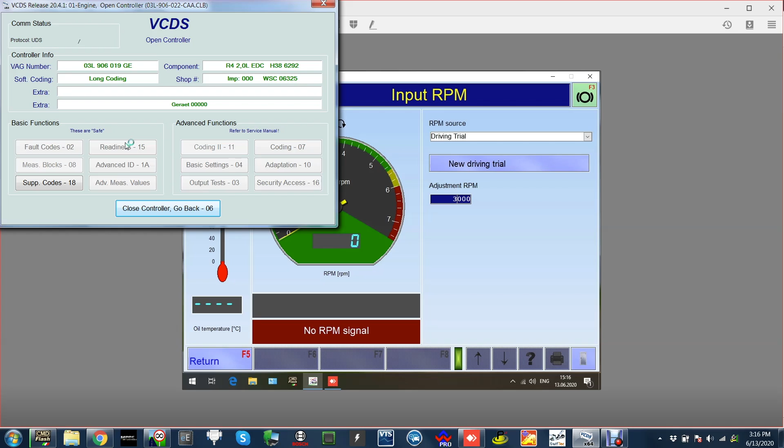So I'm going to go back out of that, go into engine, fault codes, don't worry about that. And then you've got advanced settings. So I want to load selection from file. I'm sure I've done this before and saved it, probably have done. 2 litre logs. So I'm going to switch over to the 2 litre logs. Have I got enough there? No, I haven't saved a lot on that one.

Engine speed, coolant temp, charge pressure specified, so I want charge actual. Charge actual, air mass actual, intake air temp, limitation smoke, and I need another one, accelerator pedal. And then I'm also going to have exhaust gas temp sensor 1. Just keep an eye on the EGT temperatures.

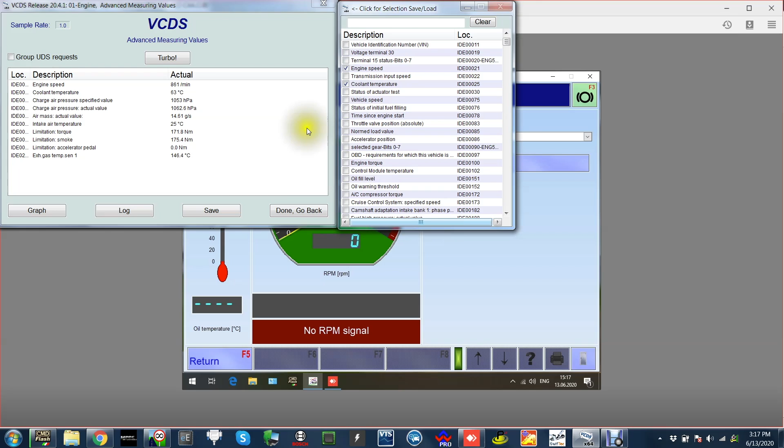So that is that. Now I'm going to save that because obviously I didn't save it before. So I'm going to go down to 2 litre D, logs, and overwrite. Yep. So that's always there when you want to pick it up again. You don't have to keep finding them and choosing them. So I'm going to go to log. I'm going to go to T6 stock run 1. So I'm going to get it in gear on the dyno. Set the dyno up to the van.

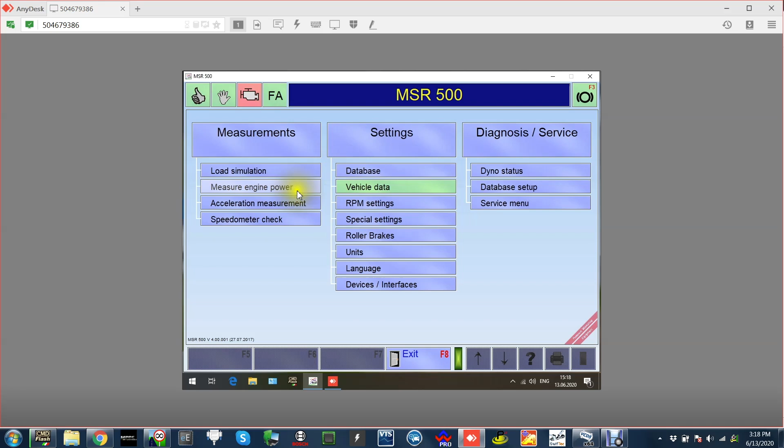So switch to 2-wheel drive mode, just for the purposes of this. If I go to vehicle data, front wheel drive, accept, unlock, back to measure power, continuous measurement. Normally run these 4-wheel drive, for some reason it doesn't like it today, so I'm just going to run it 2-wheel drive with the SPL. So get it back in.

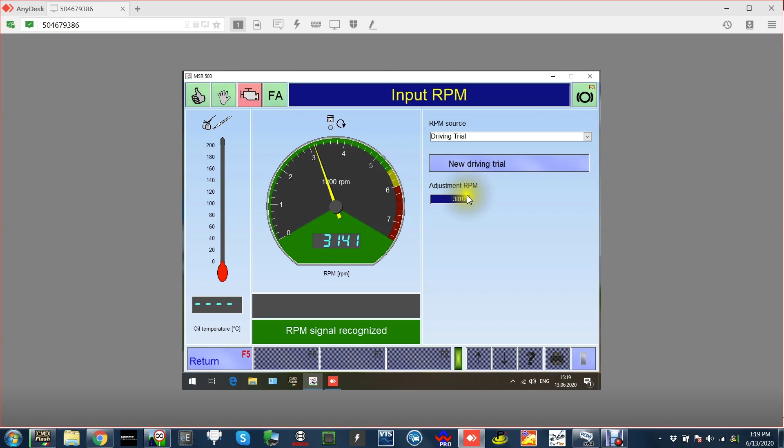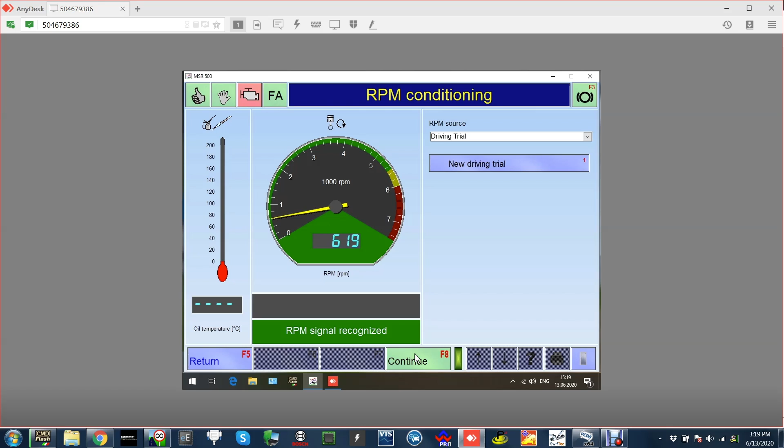Better. Bit funny down low still. Right, set 3000, 3000. That's set. Come to a stop. That'll switch over, open up your logs, start. So I want to go in gear 4, this is a 5-gear van, not the best vans but it'll be alright.

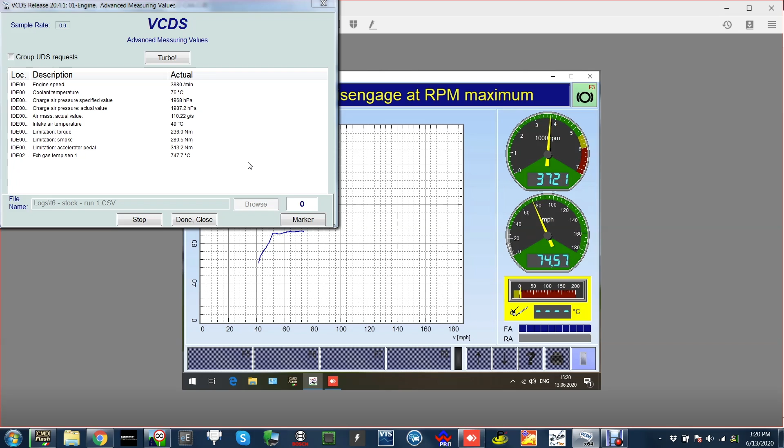Load it up, 3, into 4, right now run. Let it run. It's quite a warm day. As you can see, the intake temp's getting quite hot, and so is the EGT. 4.5. Should be about enough. So let it run down, measure the losses. Stop the logs. Done, close.

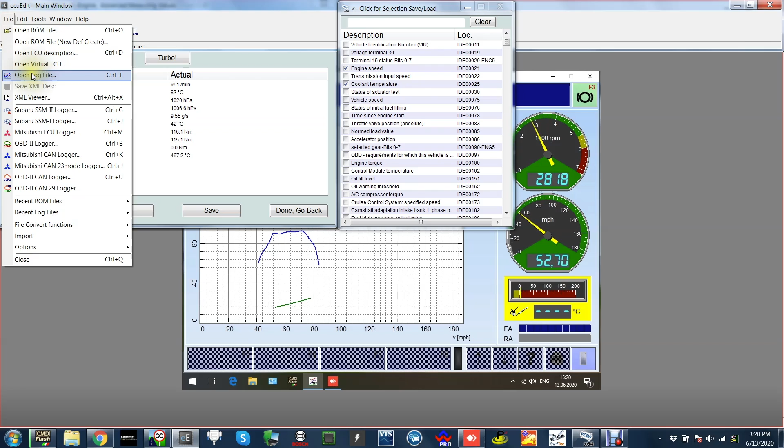And there we'll save. So if I look now into the logs, open log file, T6 stock run. Right, so there you go, we have the run. It's quite a long run, got the ramp quite low. So as you can see, EGT was at 747, not too bad. Limitation accelerator pedal was 420 newton meters dropping. Yes, 420 down, it drops down.

And then we've got the limitation of smoke, it's a little bit less at 391, 385, and then we've got the limitation of torque. So straight away you can see that's going to be my limitation, because when the ECU is doing the torque, it looks between all three charts. So right, I'm requesting this much, the smoke is saying this much, and the torque is saying this much. So the lowest of those three will be the one that it actually does, and in this case it's going to be the limitation of torque.

So our air mass is quite good still. Charge air pressure 1.4 bar peak. You can kind of forget the peak, look more towards the hold, slight overboost. So it's 1.3 bar, 1.245, 1.1. So you take away the atmospheric pressure, so it says 2.1 but it's 1.1 depending on the atmospheric pressure today. Charge specified is, if I can get on it, 1.2 bar, so fairly low.

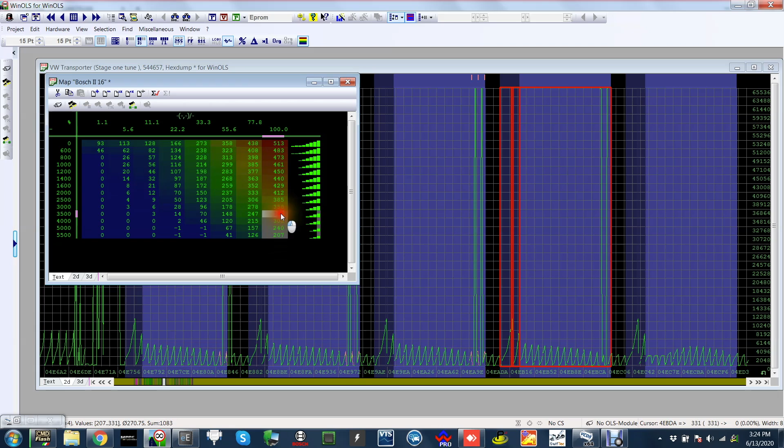It's always awkward working on a laptop when you're used to using a mouse on the screen. Difference between Dyno and sat on the computer.

So it's like a 4x4 map. Just gonna bump it up anyway. Let's get them all above 300 newton meters. Right, so that's that done. So next, that's the driver's wish now above 300 newton meters. So we should be away from that limit now. In fact, we'll look into it actually. I think I'm going to need more. We'll come back to those.

So next things we know. So we've got the torque maps. So now we know that these are limiting us to 300 newton meters. As you can see, it's what, 292, and backs off. So they're very low. Now what I do is I look at the torque conversion maps. There's two maps, major boost maps here. So you've got these two maps here. Now these are calculated to tell the ECU what kind of fuel it can use. And this top line here is newton meters.

I'm only here. So 300 newton meters on the logs. If we look back at the logs, the lowest was 300 newton meters, which was the torque map. So that's the map that this van is going to use. So you've got 297 peak. So I'm only on this line here. I know that I can move to here and still be covered by how the ECU is already set.

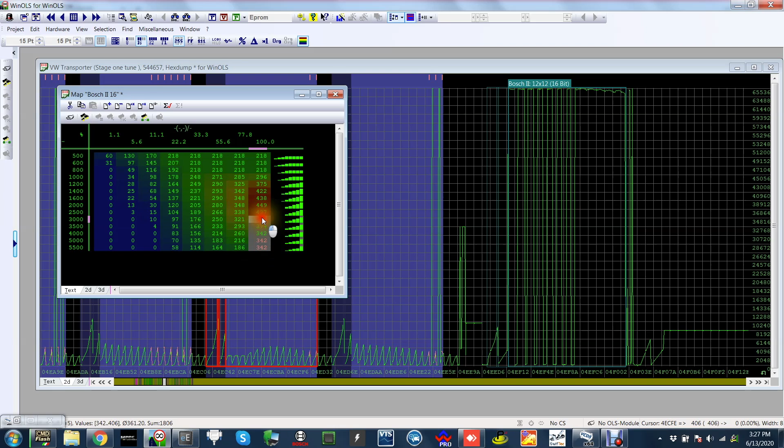So if I use this, I'll show you. So if I go to the limit maps, I've got these driver's wish maps here. Right, I've got 420 Newton meters, so I'll bump all these to 429, 429, 429, 429. So I'm above 420 Newton meters in these there. So just to make the power, let's get these up above. I'll press something else there. No, that'll be okay. Still above.

So to get the power up, right, I've done them. So they're now out of the way. Let's deal with the Newton meters first, and then we'll go back to everything else after, and I'll show you what's going to happen when I run this van with just changing these few maps. So these are the torque maps. These were the lowest maps, if you remember, from the previous. So the peak on these vans is quite low, and it holds.

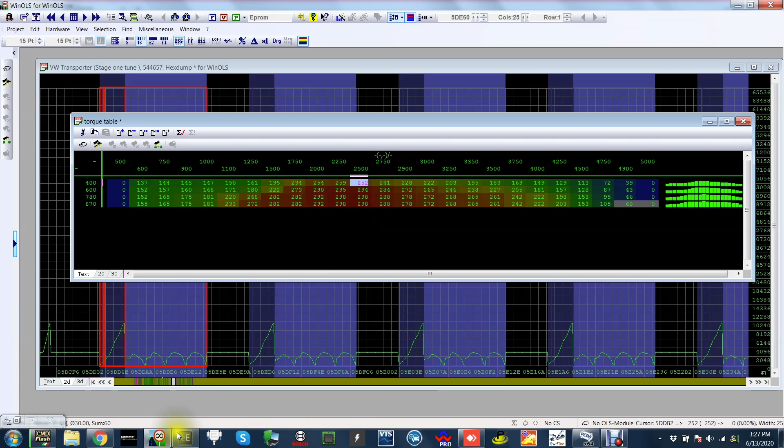If I get that dyno graph up, the peak's around two. Being a diesel, it should be around here. It started to run quite late, so around 2k, 2.2k is where it starts to really start ticking off. So if we go here, bump that up, and just blend it in for the rest, just to give it a smooth transition. Obviously I'm not going to see these two lines, I probably won't even see the third line, so I'm just going to move those off.

And that's what I'm going to do. I'm going to copy the bottom line, so 870 atmospheric, being in the UK, is about right. So I'm just going to load this in on all the maps for the purposes of this video.

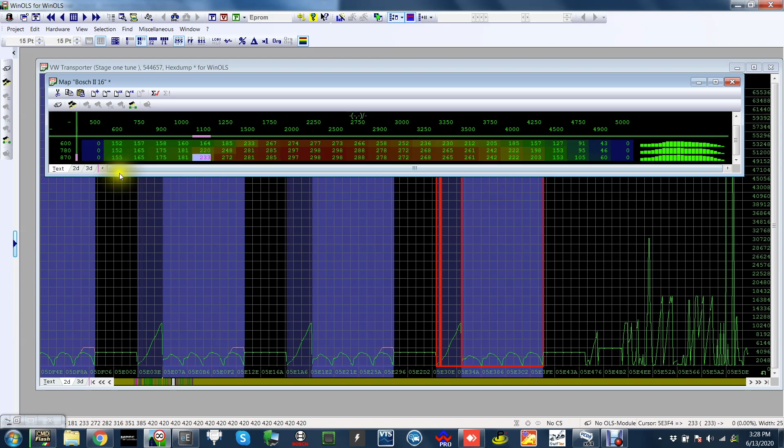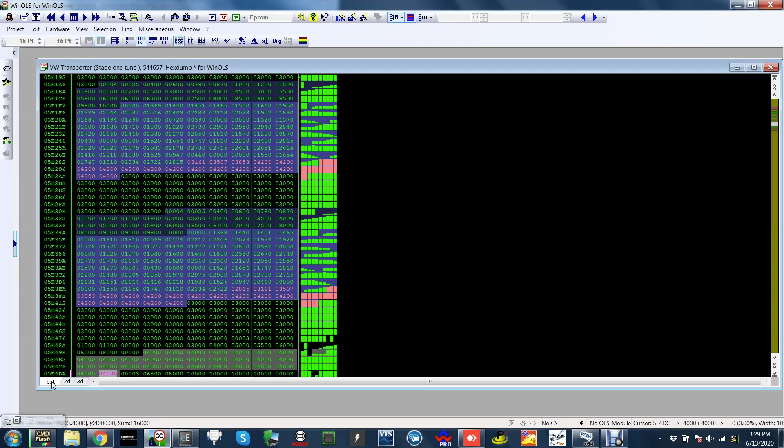So my lowest map is now at 420 Newton meters. There is a limit here somewhere, I think it's that one there, which is also at 4,000. So I'm just going to bump this limit up to 4,200, just to make sure I'm not capped by anything. So bump that up. Okay, so now my torque limits are at 420 Newton meters. So there's one left, which is a smoke map.

So we need to go back to our Newton meter conversion table, which is here somewhere, and let's see where we are with this. So if we go back to our Newton meter conversion table, we're at 420 Newton meters. Now we're going to be at 65 milligrams of fuel. So straight away we're going to move into a higher level of fuel. So if we look into our smoke map, it's at the end here, we're going to have 65 milligrams of fuel.

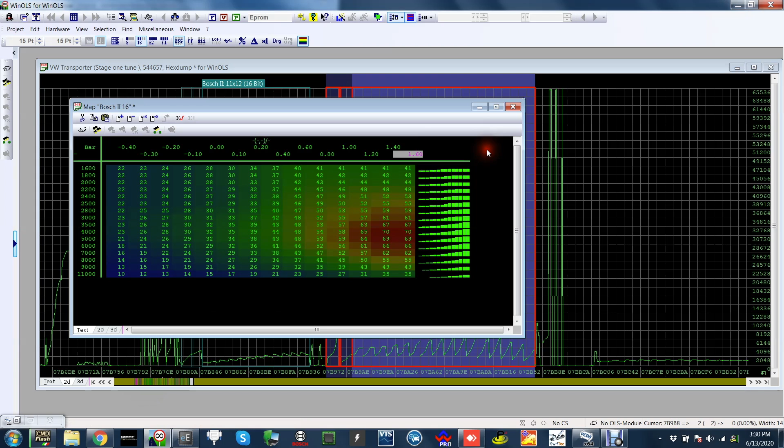Now I'm going to be around here now, so anywhere between there to there, 65 milligrams is there, so I've still got enough there to cope with it, so that's fine. I'm up to 1.6 bar as well, boost pressure I can have, so I don't really think we're going to touch that. So let's look at the boost tables.

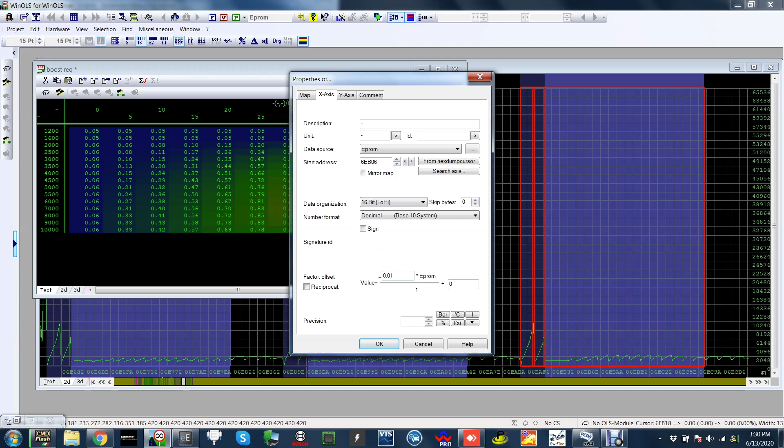So these three are the biggest. So this is boost. So if I call this boost request, and then I switch it to bar, to make it more sense. Top line is milligrams of fuel. So we've got RPM at the side, obviously done wrong on there. So if I go 0.25, no, 0.5, yeah. So I've got 0.5, so I've got RPM, I've got boost in the middle, minus atmospheric pressure, and I've got milligrams of fuel at the top.

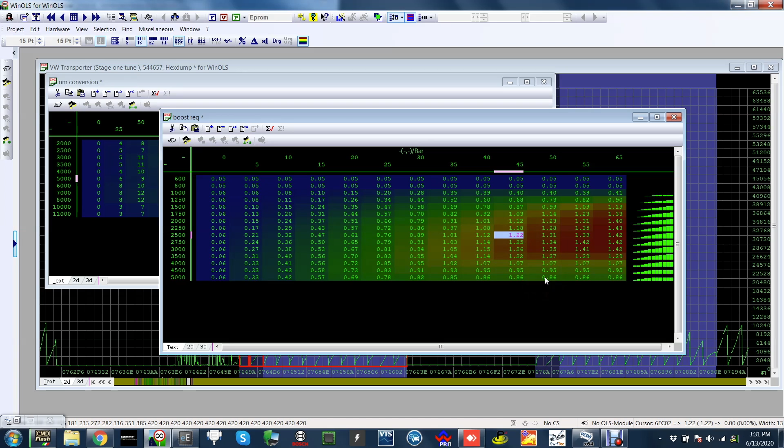Now, when I was on the old table, if I go back to that Newton meter request table, just gone past it, if I go back to here, before, at 300 Newton meters, I'd have been running around 45 milligrams of fuel. So I'd have been running around here, on this line, so at 1.2 bar. If you remember, I was at 1.22 bar request. Now I've bumped it up to 65 milligrams because I'm on 420 Newton meters, because I've moved all the limits. I'm at 65.

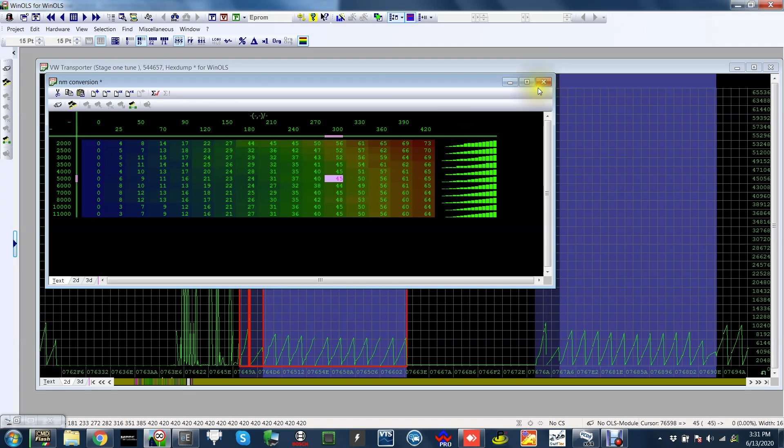So now I should see, without me making any changes, about 1.4 bar of boost. So I've raised the boost by 200 millibar without making any changes to this boost table. That's if what I'm saying is true, that's what will happen. So the torque limit's gone, the driver's wish is gone. So I'm just gonna now export this. Stage 1, 2, nope. Say YouTube. Export this in now.

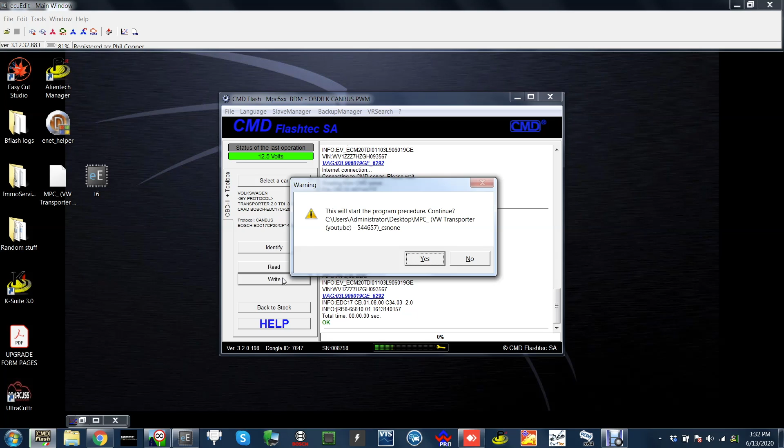I'm going to write this to the van. Just get me switch the van off. Find the cable, it's on the floor somewhere. Here it is. I'll plug this in here. Right, I'm going to write that map onto this van. So that one there. So identify, yep. Right. Smash that on here. And then we'll see what we make just off those few changes.

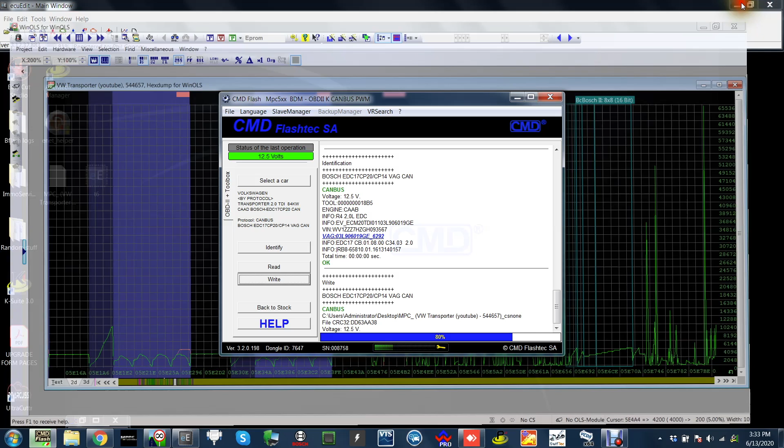So all we've done while that's writing, I'll go back to the start. I've got 1, 2, 3, 4, 5, 6, 7, 8, 9, 10, 11, 12. I've changed 12 maps. Just by looking at it, working it out, seeing what they've left me, see if there's any free power to be made without really changing how the OEM have set this van up. I've got 12 maps changed, and well, 2 groups. So let's just write this on now. I'll fast forward this bit just so you can get to the nitty-gritty stuff, which is going to be the next dyno session.

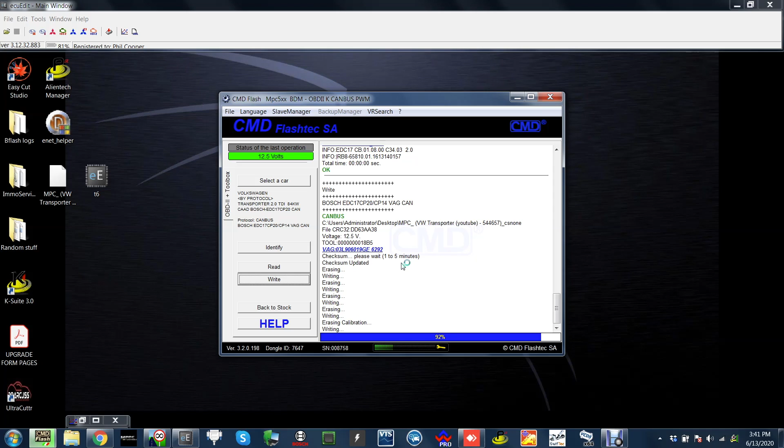Right then, so done. That felt like it took forever, but that was 9 minutes and 30 seconds. Right, so now van off. Hopefully it starts. Yeah, it started. Right, it seems to have flicked off the ESP again, so I'm going to have to set that back on. I'll just get all plugged in. Right, VCDS. All plugged in? I think I am. So let's get back on this.

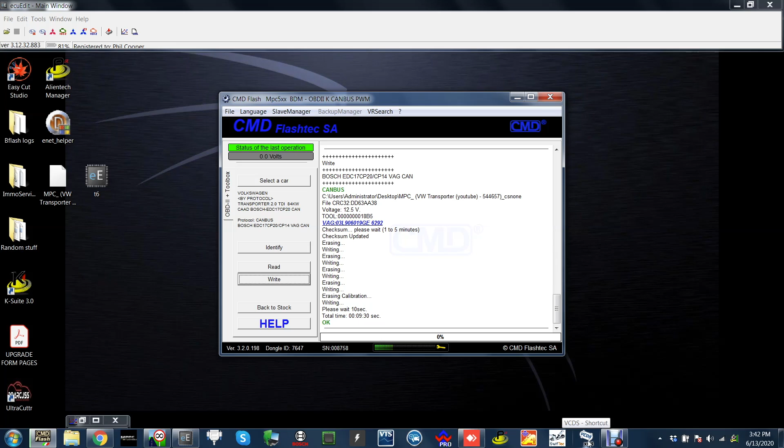So VCDS, select module, ABS brakes, basic settings, switch to roller test bench mode. Go! Right, that's now on.

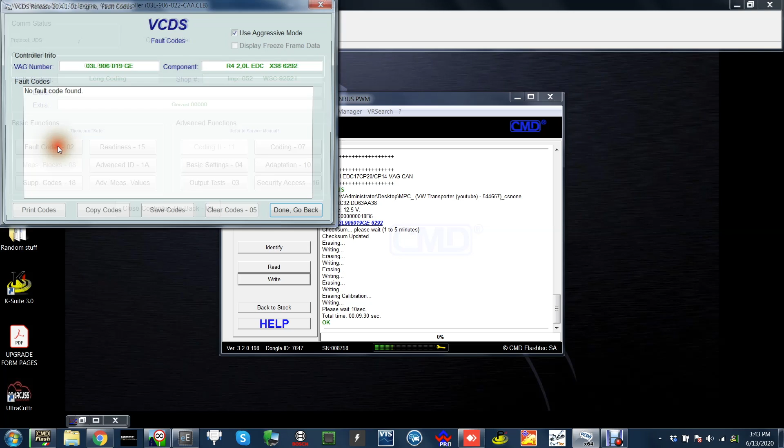Back out there, back into engine. Fault codes: none, still, that's what we like. So we go back to advanced measurement values, back onto that same file we were on before. 2 litre logs. There we go. So back to the dyno.

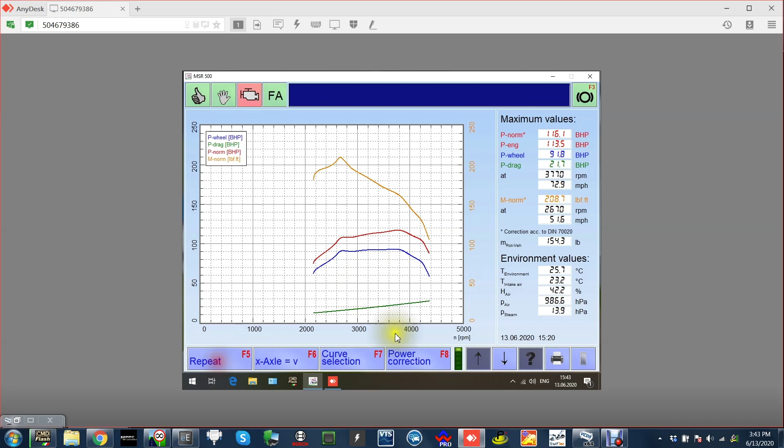So I'm going to save that so you can see the difference between the two. So save T6. Yeah. File: stock run. That was a stock run. So I'm going to repeat. I'm going to load the stock run back over it, like so. Right, let's run it up again then. Let's get back into gear. Set this log off.

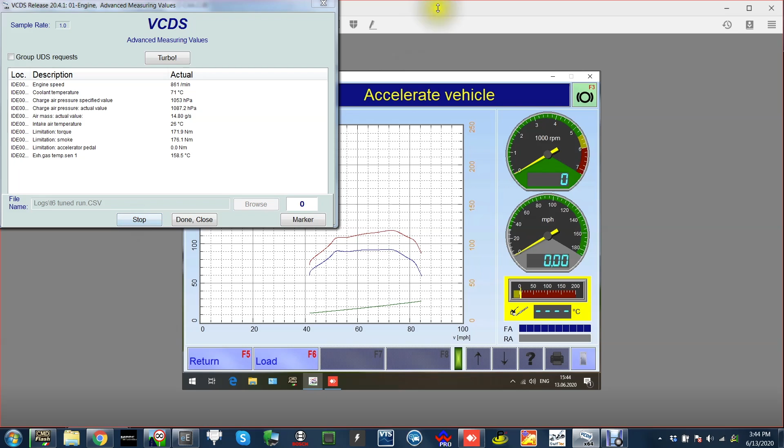So T6 tuned run. Tuned as in I've moved what, a couple of tables. Right then, so just moving these few tables, let's see what she makes. So I'm going to start the log off. Fans on, dyno's on. Let's go. Back into gear. Back into fourth. There we go. Nope. Yeah, it played up a little bit then. They do sometimes. Let that run down, run it again, get it in the right gear.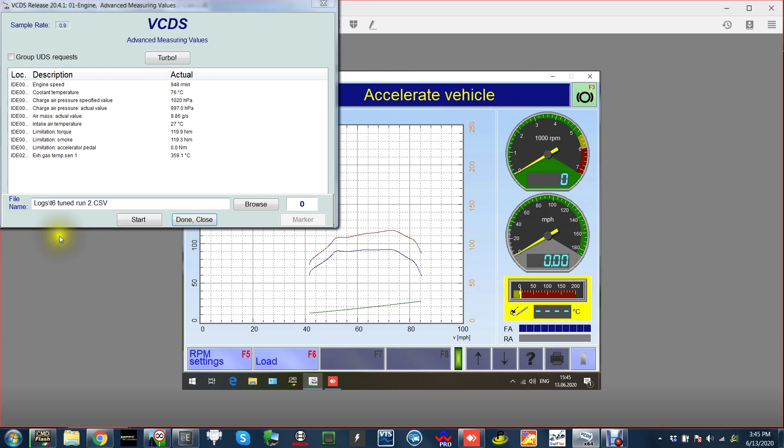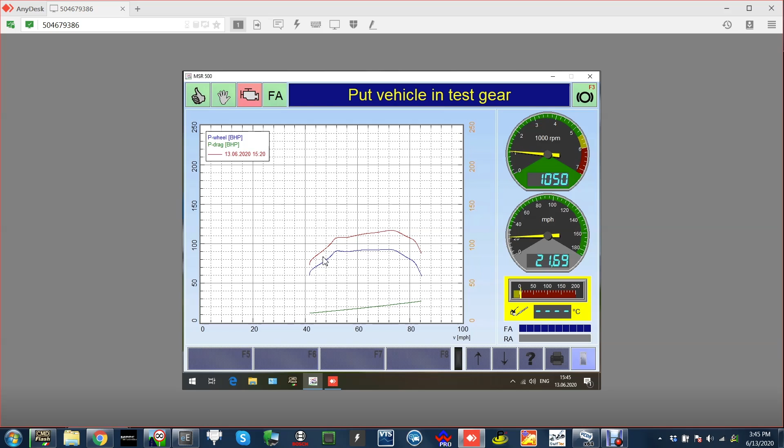Rapid, right, repeat. Yes. Right, we go again. Let's bring it to a standstill. Going to stop and start the logs. Stop. Done, close. Log: T6 tuned run 2. You get this on dyno sometimes, as long as you don't keep doing it. Right. Get the right gear. Let it load up. There you go, 4th gear pull.

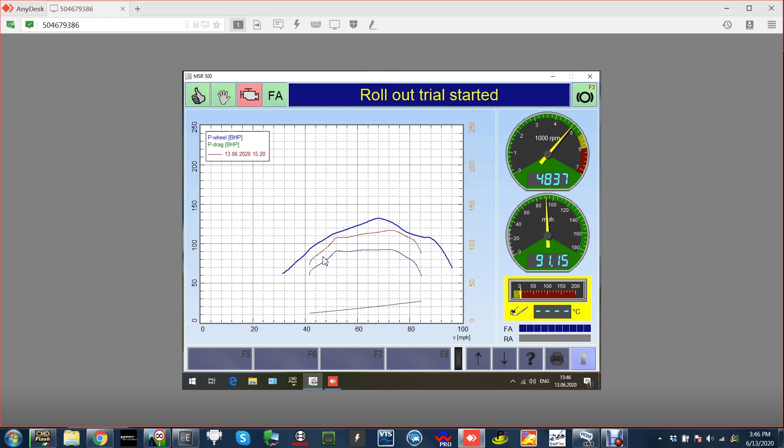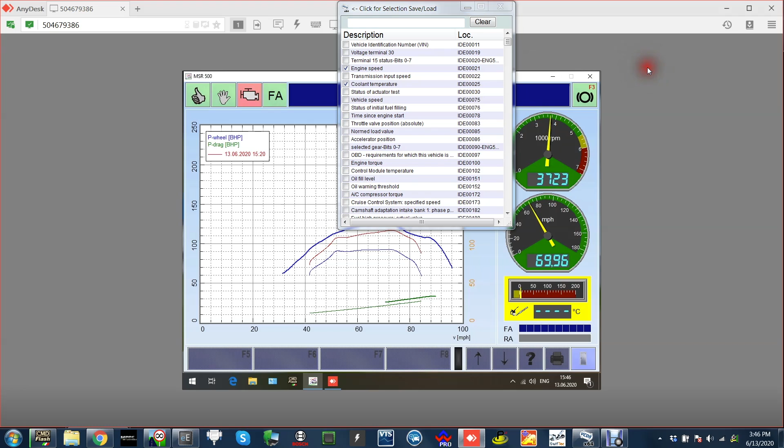Just going to stop the logs. You can have a look over those. Let that run down. Remember, this is just a few little maps that have changed, 2 tables in a sense, really. And we are now at 158 horse, 265 foot-pound. So as you can see, it's very much changed the way the graph is. It's quite a hot day today. So there you go. Just moving these two tables gives you enough to get going.

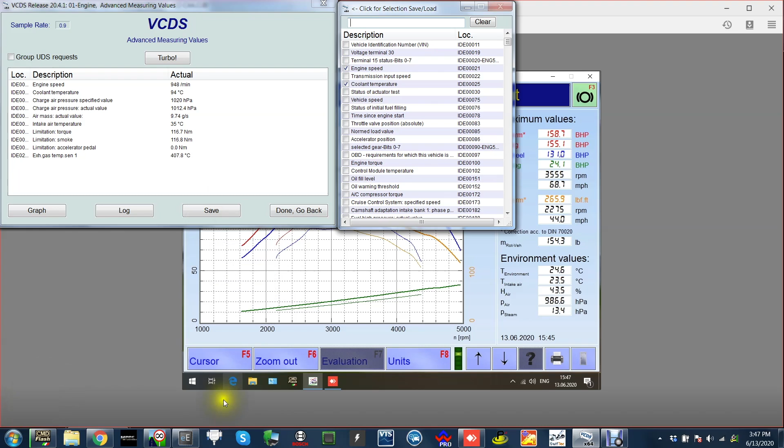Now what's happened is, if I look at the logs, if we get that log back open, get rid of that, it's annoying. If we get this log file back open, the T6 tuned run. I'll look here, so from before, we've got limitation torques now up to 420 newton meters on the smoke, 430 newton meters on the pedal. Exhaust gas temp at 753, so pretty much where it was anyway.

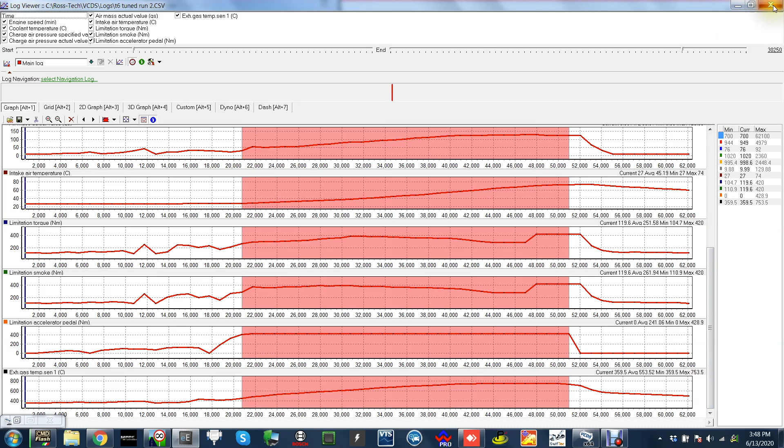The boost is now at, remember it was at 1.2 bar before, now at 1.448 with a 1.36 bar request, so that's up. So just by moving those few tables, we've pumped the boost, we've pumped fuel, we've pumped everything that we need to pump to make some power. And that is the outcome. So we've gone from that little orange line there, that red line, to that red line there, so it actually goes faster in the gear too, and that blue line.

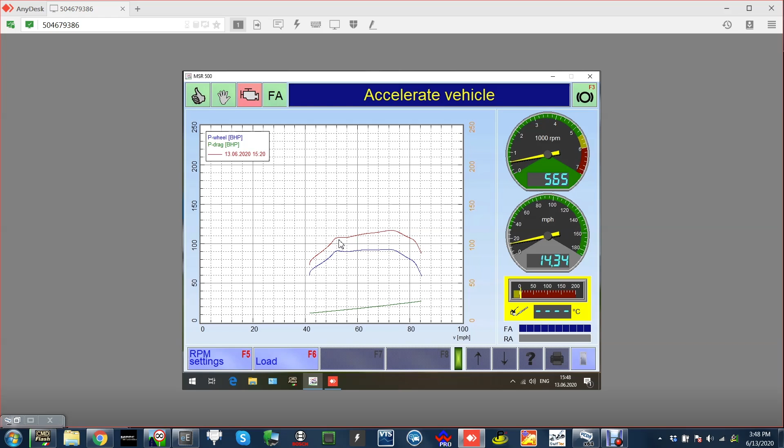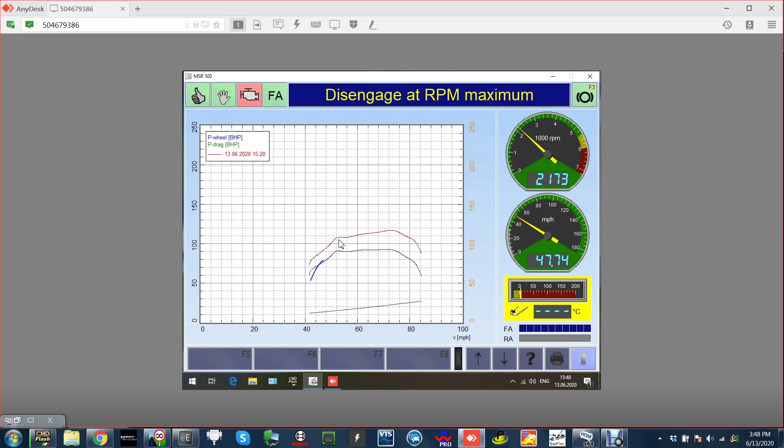I'm just going to run it again just to see if I can get a cleaner run, because I normally run quite clean. Let's reload, repeat. Just to see if I can get back in the right gear. It's a bit clumpy for some reason. Nah, that's it. We'll leave it like that. A little bit of a pain in the arse to run.

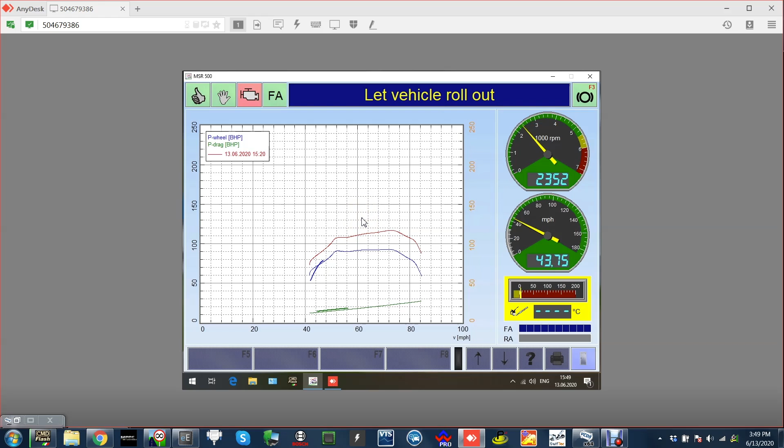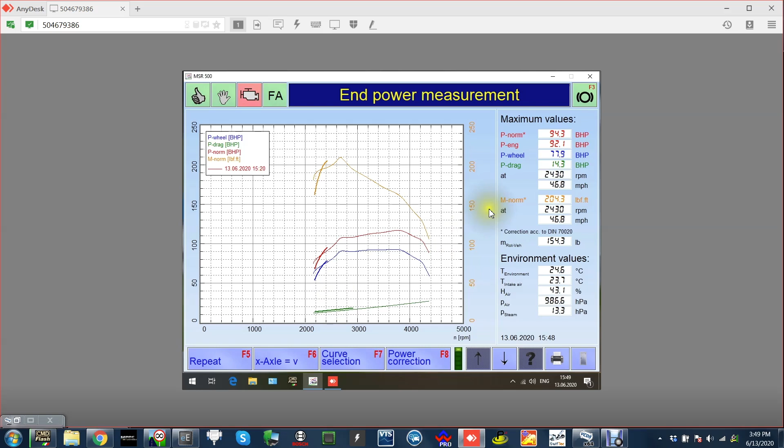So we made, what, a good 40 odd brake. On a cold day, they normally run about 168 if you set them to those settings. But today we ran a 150, and so we gained 50 foot-pound and 50 HP just by moving those few tables. Now I generally just go in, tidy it up, maybe add a little bit more fuel pressure just to make it a smoother run with some torque. I'm done.

So that is how to read a map, look into it properly, change a few tables, use what the OEM have given you, and tune it up. So that's me done with the van today. Pretty hot day. We made a good 50 HP and 50 foot-pound just by those two tables. Quite an easy van to tune, and that pretty much goes across a lot of them with that module. The 2 litre engine has about 4 different outputs, and that's pretty much how we set them up to make the power that the bigger boys are supposed to be making. So a little bit more tuning, smooth the graph out, but pretty much done. Power wise, you just really go into torque and smoothing the graph out when it comes to fuel pressure and things like that.